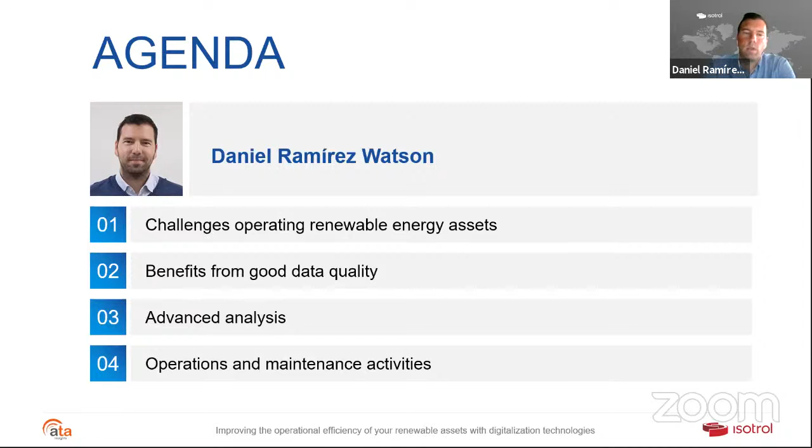First of all, a quick introduction on Isotrol. We're a technological partner for large utilities and renewable energy companies around the world, working in all continents with over 45 gigawatts of renewable energy assets that are being monitored and controlled by our platform, by our solutions. And our experience pretty much covers the entire value chain, which is renewable energies, trading, grid integration, and control of the assets. So let's start.

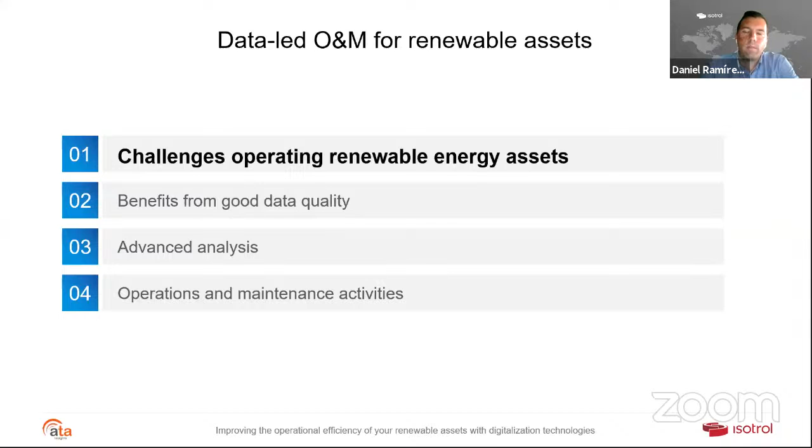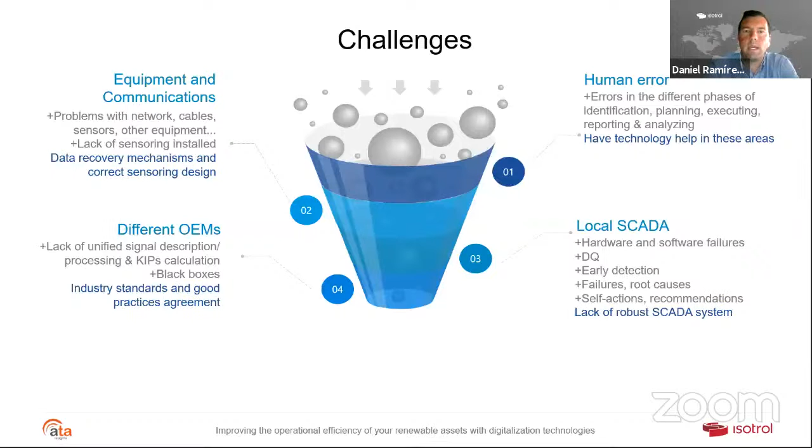Some of the challenges that we've seen in renewable energy plants are for sure failures in different types of equipment and communications from various natures. Having different OEMs, manufacturers spread throughout the plants, and some of them don't actually interact with each other as well as we could expect. Then we always have human error, which is also going to play a role in any project or system that we might have. And we can also have the local SCADA system or communications monitoring and control system have failures or present problems. So we want to talk about things that we can actually do to try to mitigate the challenges that we have.

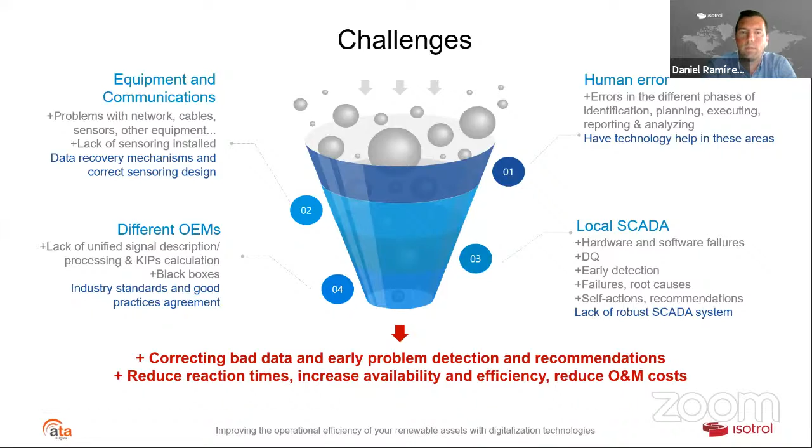So one of them is correcting bad quality data and being able to have early detection of problems and perform recommendations. And all of this is based on trying to reduce the reaction time that we have in our assets in order to increase their availability, the efficiency of the devices, and trying to help on the operation and maintenance side to reduce their cost. Okay, so those are some of the problems that we want to solve.

I want to show you some benefits of having good quality data. So the quality of the information is key. If you don't have good quality data, you're not going to be able to produce accurate KPIs or information. You're going to be working with false results, basically. You're not going to be able to do early detection of issues, and you're not going to be able to speed up the decision making based on the problems that you might have. And therefore increase the operational efficiency, optimize the O&M, and maximize the profitability of the different assets and plants, which is the end goal.

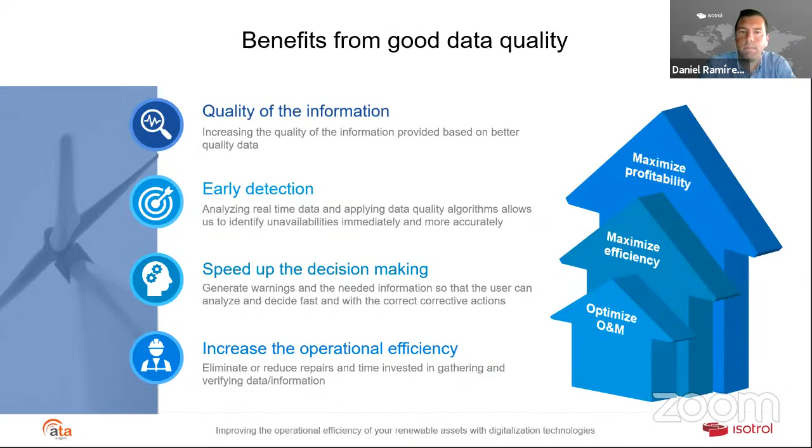Let's look into some of the advanced analytics that we have. So basically, we want to put artificial intelligence and machine learning at the service of renewable energy asset owners. Basically trying to help in the automatization and the detection of different problems that we might have in the plants. Very important to be able to talk about root cause problems, actually find what's going on in the plant, put the spotlight on what's going wrong, and be able to provide a recommendation.

Sometimes the people that are actually performing asset management might not be an expert on a specific wind turbine model or on a specific inverter or on a technology of renewable energy. Maybe they're coming from wind and they have to start working in solar. So having recommendations from the systems that are actually monitoring or supervising the renewable energy assets is crucial.

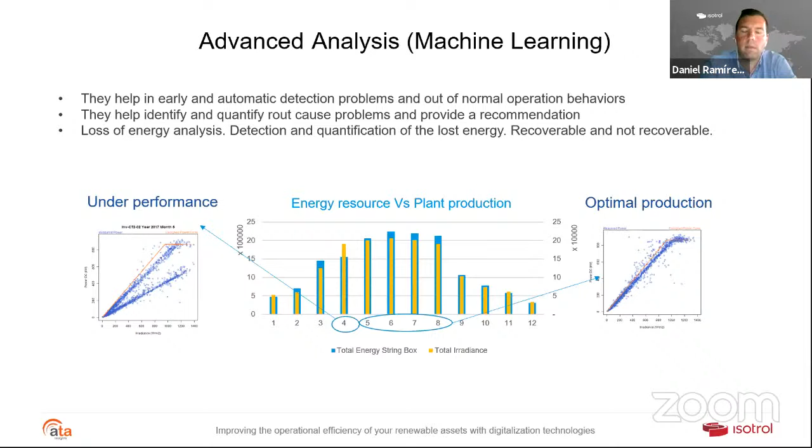We need to know where the loss of energy is coming from. If we don't have a good spotlight on where we're losing our production, we might focus on a problem that could not be affecting the plant as badly as another one. So that is not acceptable, and we need to have a good loss of energy analysis and breakdown, quantification of these energy losses, and a look at whether we can recover them or not.

This is an example of different tracker behaviors, the correct tracker behavior that we should have during the early hours, during midday, during the afternoon, and a view of some of the graphs that would allow us to identify if we're actually having a tracker blockage, a tracker deviation that is not properly following the correct angle it should according to the time of day, and a breakdown of different energy loss causes here on the right side.

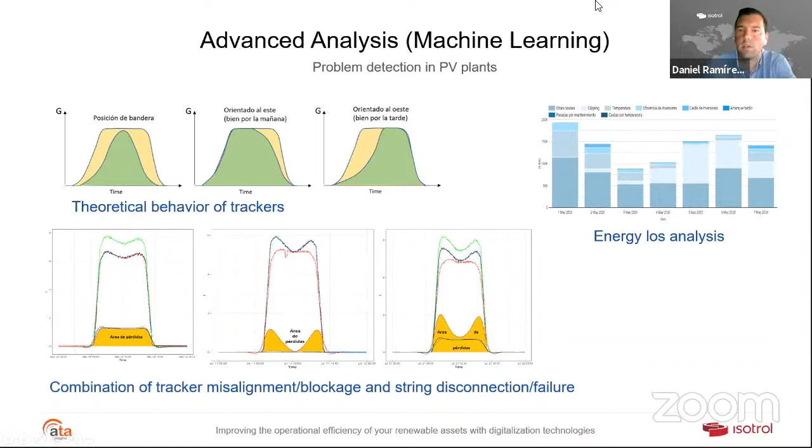Another example, we can have losses associated with multiple effects, like clipping, soiling, panel degradation, cooling problems in the devices, a bad design, lack of sensoring, problems with the sensors, bad quality data, gaps in the data, or lack of standardization in the different devices. They're not communicating properly with each other. Black boxes that we might have out in the field with devices that are not sending enough information for us to make analysis.

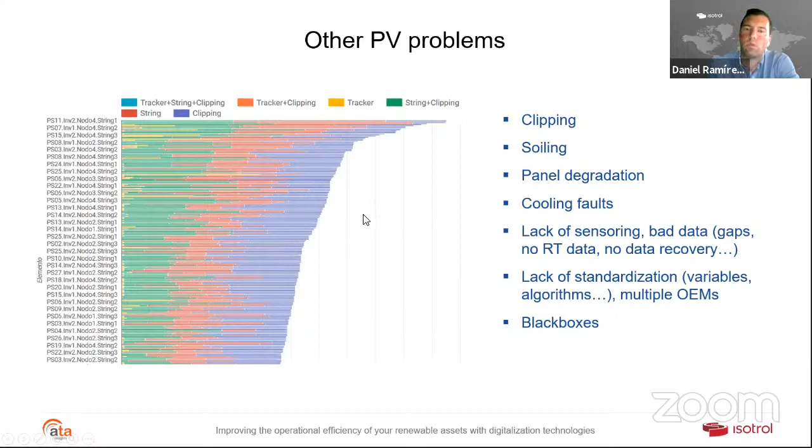So it's very important to be able to make a breakdown of what is causing each energy loss and where they're located, in what device. That's pretty important to be able to make the decision and see where we're losing the most energy.

If we go into the wind farms, we can have another set of multiple issues affecting the performance, the power curves of the wind turbine generators, and those could be external or internal regulation of the wind turbine generators, problems, stops, pitch or yaw misalignment, wake effects by other turbines, or an energy resource problem, or even a power curve deviation from the theoretical manufacturer curve.

So it's very important to be able to plot this, analyze it and compare it over time, and with other devices that could have a similar behavior of a similar nature, in the same wind farm or in a nearby wind farm.

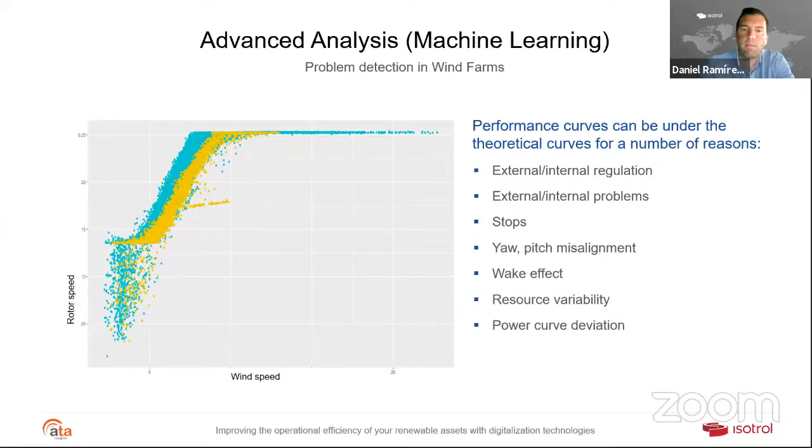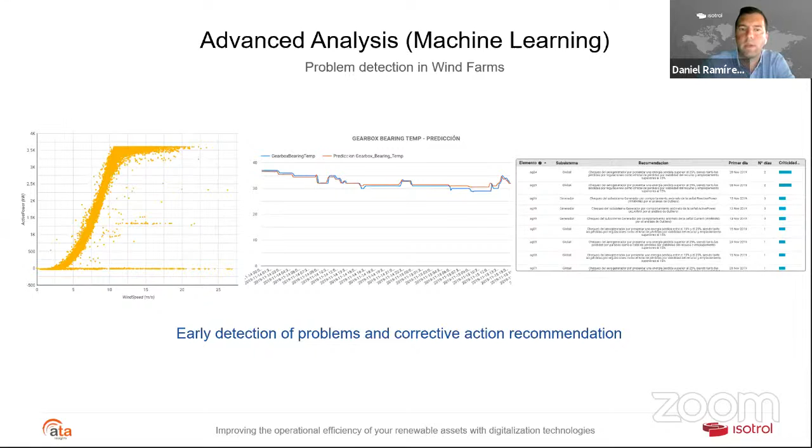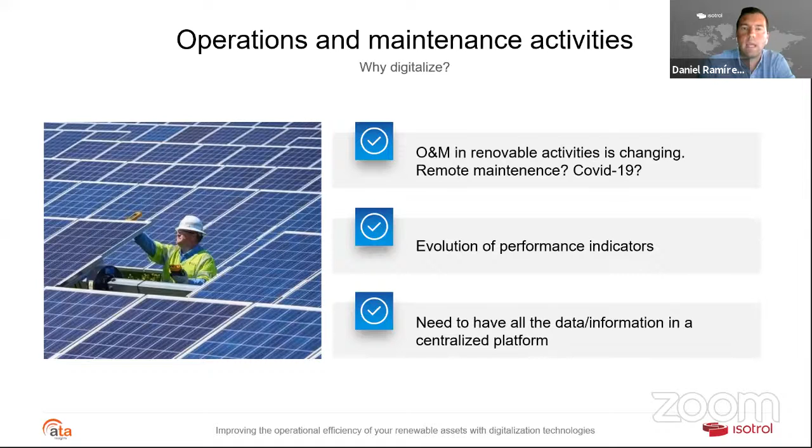And to finish, I'm going to talk a little bit about O&M, a lot of it related to COVID-19, the unfortunate pandemic that we have nowadays. Also, some of the evolution that we've seen in this direction, and the really high need to have all your data and information centralized and usable for customers.

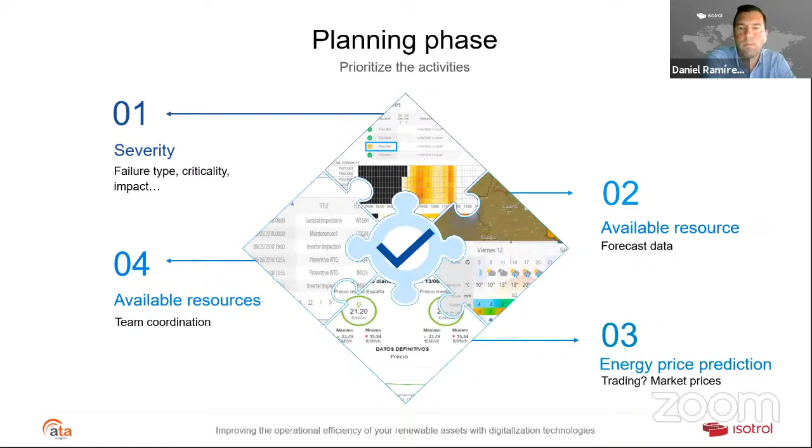It's very important to be able to categorize the events by severity, what's happened in them, and also, either integrated through third-party systems or your own system, to know the energy resource that you're going to have, the forecasted data, and how urgent it is to send crews on site depending on the available energy resource in the following days, and make sure that you have the necessary resources to perform the work, in consumables, tools, manpower, supervisors, etc. And of course, know the energy price, the market price that you will not be making because of shutdowns, preventive or corrective maintenance.

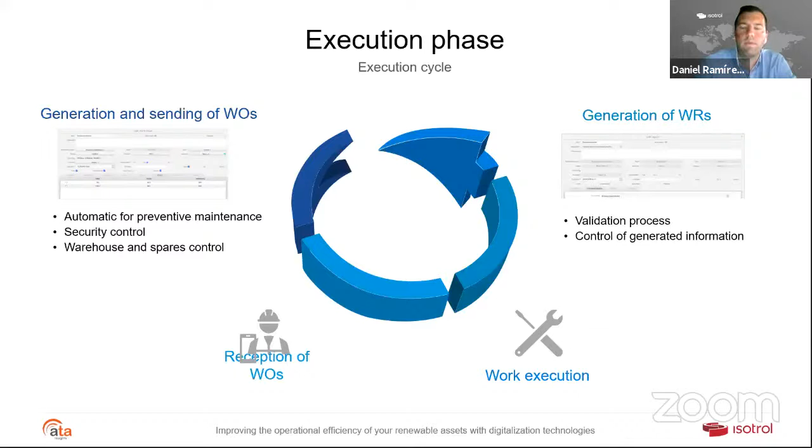Next one would be the execution phase. This is very important to help assist technicians and try to reduce the possibility of human error. So basically having very strong work orders, very easy to fill out in an automatic way, making sure there's no open loops, and no information is going to be lost, making sure you're managing your personnel, your warehouses, being able to receive these work orders in mobile devices, also pretty handy, very important, and have a strong validation process, quick, paperless, and having control of the information that is being generated.

And at the end, like we said, it's good to run data analysis, to run lessons learned, to be able to know what's happened, how long I've taken, if it's complying with the contractual requirements that we might have. So being able to manage the information that has been produced from the O&M side is also very useful. At the end, as a bit of a summary, we're trying to identify and reduce losses, cater to improving the operational efficiency of the plants, and optimizing the O&M tasks that we're performing in order to reduce those costs as well.

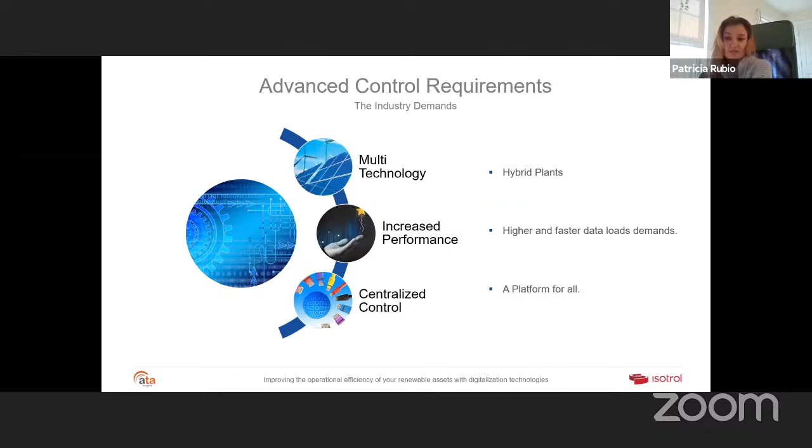So when we look at the most recent industry shifts, we identified 3 major points. We're seeing more and more multi-technology projects or multiple manufacturers for the same technology. We're clearly encountering a growing demand for increased performance and ultimately the centralized control. We need to be able to provide a platform that can be accessed anywhere at any time by different users with diverse profiles. And it needs to also be capable of integrating into third-party systems without incompatibility issues.

So when facing multi-technology challenges, we're looking at a demand that asks for a complete integration compatibility. This means overviewing and interfacing with multiple parties, such as traditional controllers or battery management systems, RTACs, generation units, etc. And we're needing to become vendor agnostic. So we're challenged with a new level of control hierarchy. We're adding for this a new layer of applications to achieve this.

And we need to do this without virtually impacting the unified response of the integrated system. Our users are demanding a simplified and standardized control overview, which is independent to the technology it's integrated to, at the same time as it's allowing us to model the algorithms for their characteristics.

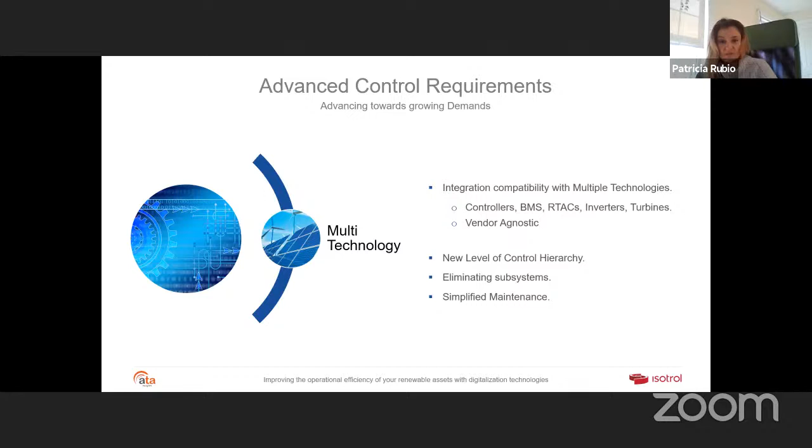And in parallel, we're looking to eliminate having multiple subsystems where possible. If not physically, then virtually. We aim to maintain links, our communication links and networking links, as close to the source of telemetry as possible, ensuring the quality of the data and other points of importance that my colleague Daniel mentioned earlier.

Secondly, we have an ever-growing demand for an even better performance, at the same time that systems integrated become larger and more complex. For example, we're looking at higher historical data extractions with better granularity, or even just faster processing times. So this requirement for heavy historical data loads is just non-negotiable. They are needed by our clients.

This is for various types of processes, from more precise and complex operations and performance reporting to even just warranty claims in which they need to provide large amounts of long-term historical values. And actually, Patricia Nefa will later be telling you a little bit more about the applications that are making important strides thanks to the capacity of successfully managing increased loads of data.

So the performance improvements are clearly a challenge. When introducing a new level of control, we need to optimize the communication protocols in response. And we need to ensure that an architecture with multiple subsystems does not add any delay to the final output. So to achieve this, besides better basic computing power and algorithms, we're demanding to include in our teams the best specialists and professionals, such as database and software architects. And they are who help us to continuously optimize these requests.

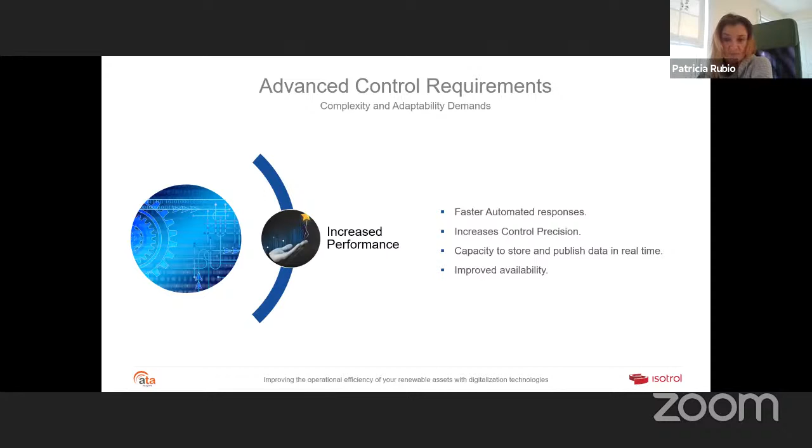And ultimately, we're not just talking about the system's performance, but the renewable energy plant itself, the performance of the plant. The production optimization is a must item of continuous analysis.

And the third, and essentially, we're challenged with the request for a platform that suits all and everyone. And we mean centralized in two aspects. One is to provide unified dynamic visualizations on company-wide platforms, which as mentioned earlier must support multiple users and multiple profiles, all integrated in one. And in the other sense, it is also required to handle multiple production technologies in a single point of control.

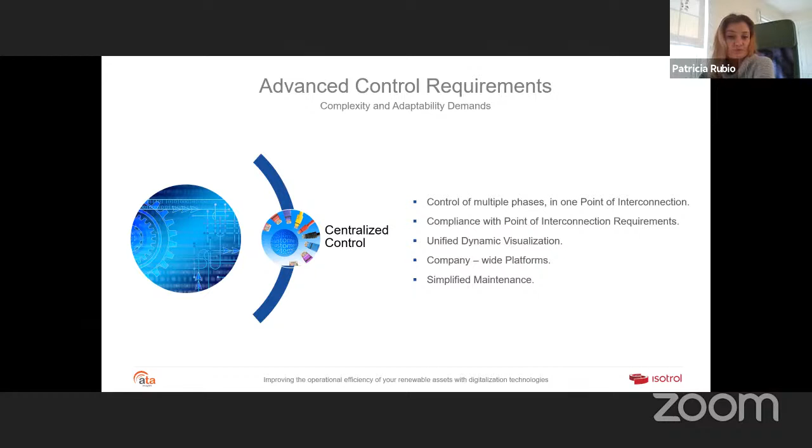So now we'll be looking at what systems are those that are naturally evolving due to the previous prerequisites. We're seeing important evolutions on platforms such as plant local SCADAs, control centers, master power plant controllers, and energy management systems. With you here today, I want us to focus on the two last ones. So these are the master PPC and the EMS, as we call them.

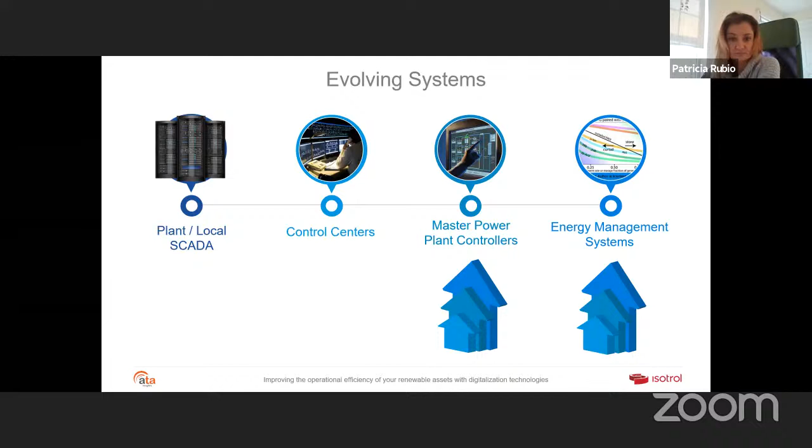So these two systems have been basically born to increase the flexibility in the controls design, and they provide better reliability. They are able to decrease deviations and penalties. They're allowing compliance with the most demanding grid codes, and they will ultimately assist in maximizing the power output from our renewable energy asset at the same time as ensuring stable responses to the operator set points and commands.

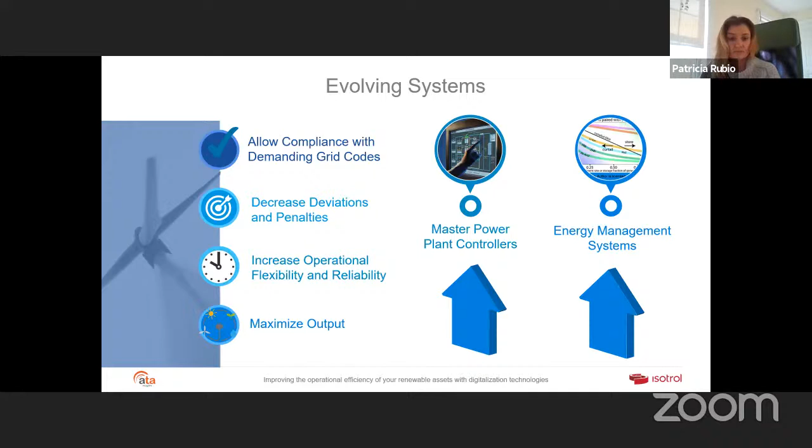And to help you visualize this, I'm going to take a detailed look at what we're describing. We're going to see an insight on the master PPC in a hybrid project application and the energy management system applied to battery storage hybrid farms. Here for a master PPC. So what I mean by a hybrid project is what we often find in a utility scale renewable energy farm, in which we either see a mix of technologies such as wind or PV with BESS, or PV and hydro and so on, or a project with only one type of technology with multiple manufacturers for the generation units.

A master PPC is basically a controller that oversees the other controllers, but it can also directly command the generation units, bypassing these other controllers. It can manage or model a slave PPC as a single generation point. It can perform direct open loop control and dispatch corrected set points, or it can work as the ultimate controller and perform closed loop iterations over the slave systems. In this element, it ideally requires a standalone system.

It is best when it's physically integrated into the substation control room, where you can access the direct meter measurements and the control elements. With this, we achieve even faster and more reliable responses. Without forgetting that the master PPC offers the same functionality as a standard PPC. It can provide an active power reference and curtailment, with the difference that this may come corrected. It can work in frequency response. It can operate voltage control and so on.

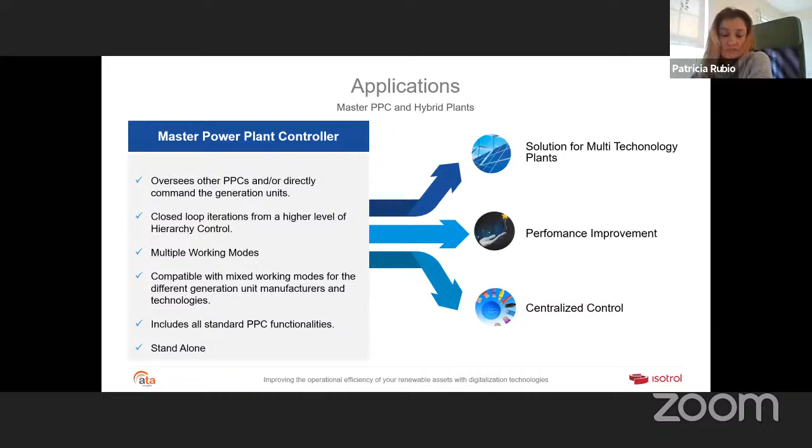And regarding the EMS that we mentioned earlier, the energy management system applied to a battery storage solution. So the main difference for the energy management system is that it's a service or an application that is often embedded in the plant SCADA, and it may share the plant SCADA database. So it does not require a standalone installation such as what I mentioned before for the master PPC. It is also placed at a higher level in the plant hierarchy for control.

So to understand it best, let's take a quick look at how, in this case, storage collaborates in a renewable energy asset. So a battery storage system collaborates in balancing services. It changes the dynamic behavior of our plant. It reduces the stress over the generation units that it's associated to. And it assists on the general system stability, as it's able to provide a very fast and controllable transient response speeds.

So with the adequate energy management system implementation, what we achieve is a generally better global automated supervision. It is overseeing the park response to avoid unwanted energy curtailments or line saturations. The energy management system is basically needed to perform tasks such as ancillary and balancing services, as well as grid services for investment deferral or congestion relief.

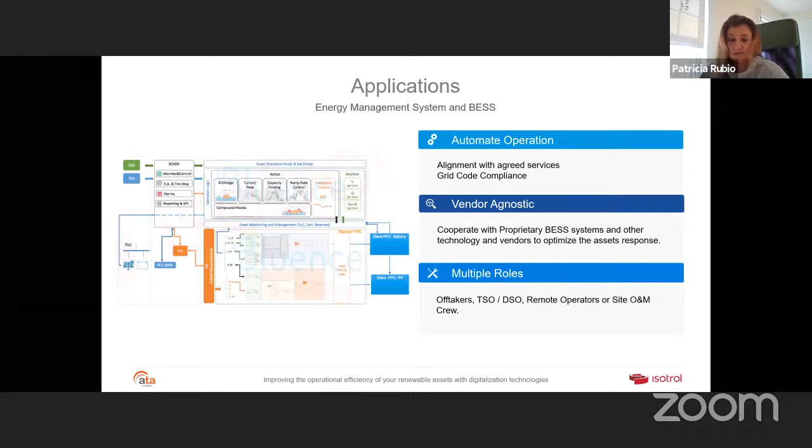For the engineering and consultancy phase, we take into account the preliminary studies, which may be provided by the client, or we may participate in some type of simulations needed to complete it. We will often work together with what we assign as a project director, a person usually designated by the client to review with us the requirements, possible power purchase agreements that can influence, grid codes, and so on. And at this point, it is even possible that we identify additional needs. We will then proceed with the design of the models, alarms, and HMIs.

During the next phase, the integration phase, we perform what we call the FATs, factory acceptance tests, over the prepared systems that have been built according to the previous design requirements. We then move on to install it and integrate it with the different subsystems and site elements. Following this, we start what we call commissioning. It's a phase that includes the final tests and fine-tuning. We perform functional and timing tests, as well as the typical site acceptance tests. And lastly, once the platforms are shown to be compliant and are accepted by the client, we establish an agreement for the long-term support and services to ensure the maximum stability and perform the adequate updates.

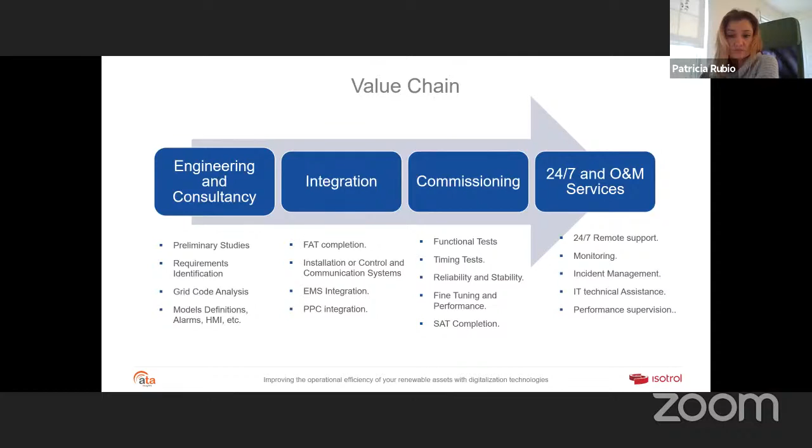And just to conclude, with these two last applications that we have addressed here, we can confirm alignment with industry demands. We have actively anticipated and participated to provide efficient solutions to the arising challenges with platforms that have been transformational in the current SCADA software and control market options.

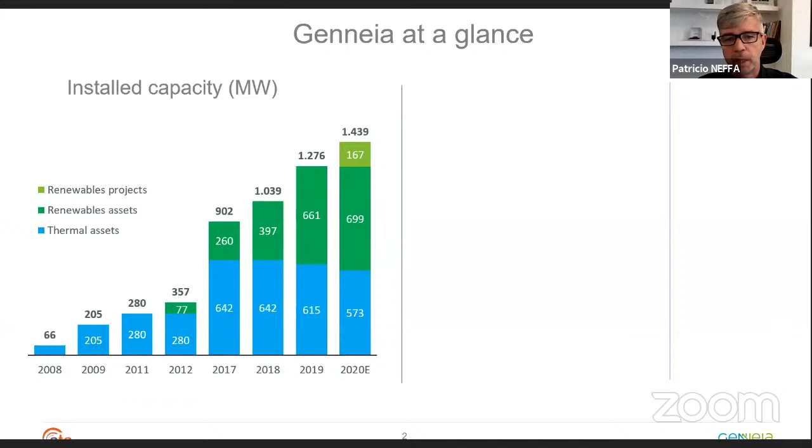Well, as a company, we are a utility in Argentina that shares more or less 30% of the green energy locally. That seems small compared to European or US scale, but nevertheless for Argentina, 1.4 gigawatts means something, a big number for us. As you can see, we have experienced a big progression during the last 4 years, and differentiation going green compared to the thermal assets, we were declining and selling these thermal assets.

In total, we have 3 main types of energy generation. Power generation from wind accounts for more than 600 megas, which is the most important power generation type. We have also assets in terms of solar and also aeroderivative turbines, gas turbines that provide dispatchable energy to the system. So the first thing that you will notice is complexity. Complexity to manage different OEMs, different types of energy, different sources of energy. This is one of the big issues that we face every day in operation.

Another big challenge we face every day is distance. Argentina is a big country, and we have more or less 1,000 kilometers between one plant and the other. So it creates difficulty in the time of travel and reaching these plants physically. So whatever tasks we can do remotely, whatever solution we can provide remotely will be very beneficial for the operation. Here you can see more or less the distribution, and you can find more information on the Genneia website. So a very young, innovative, independent utility that caught the wave of renewable energy and decided to implement, since the very beginning of the life cycle of its wind farms and renewable farms, some methodology to increase efficiency.

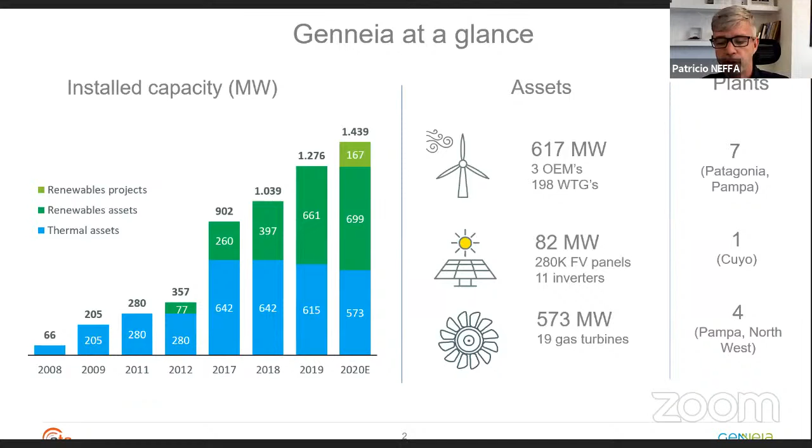So in my experience, in more than 8 years in the renewable energy sector, we have classified 3 different stages of maturity in terms of asset management. The basis that everyone can start from is what we see as the bottom line. No need to have an independent SCADA. You have 1 or 2 wind farms or solar farms. The data are provided by the OEMs through their portals. You have an acceptable performance, but limited capabilities to audit what the OEMs are doing. So we also have limited capacity to anticipate events and be very reliable in terms of prognosis of generation. And of course, you don't have an integrated asset performance management tool.

The second stage is a little more advanced, perhaps an increased scale of 500 megas to 1.2, 1.5 gigawatts, where you take the decision of implementing independent SCADA management. You create a remote operating center to consolidate the monitoring, diagnosis, and communication to the grid provider, and you also increase capabilities in terms of actions to be taken regarding production, and you audit more what the OEMs are doing. But you fail to have automated data diagnosis, and you compensate for this with internal resources, meaning analysts that will do their jobs. The next stage, what I call excellence, is the stage in which we all want to be, and probably all the members of this webinar, to reach excellence through the automation of the analysis.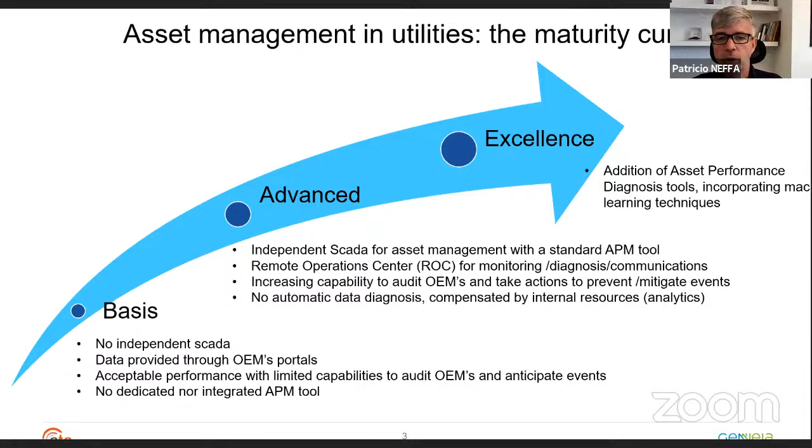So to illustrate this, I will show this image that I like very much. It's an image to represent what we feel in operation every day. When you need this data, the data is somewhere in this stadium, okay? Just as an example, 50 megawatt photovoltaic plants generate more than 80,000 tags per day, meaning a lot of information.

And typically, you will look to find this information, this data that you need for your optimization. And to find it will take you a lot of time and perhaps a lot of money. So it's like finding your buddy or your wife or your friend in a football stadium, and it will take a lot of time. That's the image that I want to represent.

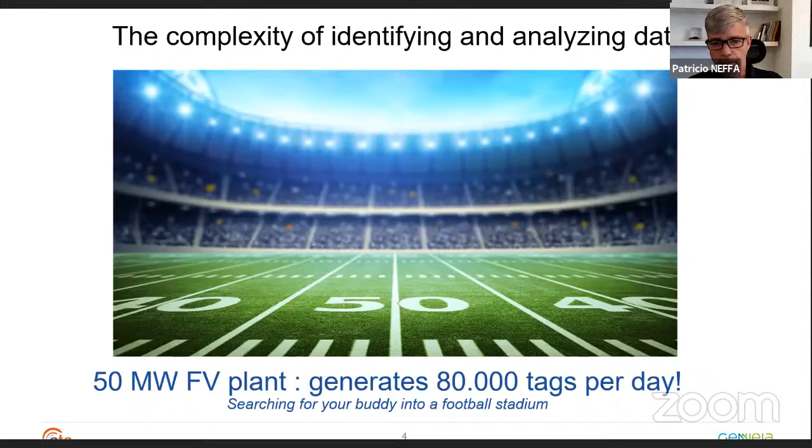So just as a case to illustrate this, I will show you what we face every day in operation. You have several wind farms in Patagonia, and you have to monitor these wind farms constantly. And you cannot have 50 guys to do it. You have a couple of guys, they are the good ones, they are very skilled, but they rely on software and algorithms that help them to do their job better.

Okay, for doing this, I take as an example something that occurred in the biggest wind farm in Argentina at 220 megawatts, with a wind turbine where we noticed from the performance analysis that something was going wrong. In this case, it was a pitch system problem. The system automatically detects that there is something going wrong.

It analyzed the behavior, comparing the patterns of the way it should work in other wind farms, and helps the operator or the analyst, the asset manager in that case, by providing some troubleshooting inputs and recommendations to do their job. So the system automatically provides information that enables the asset manager to take decisions.

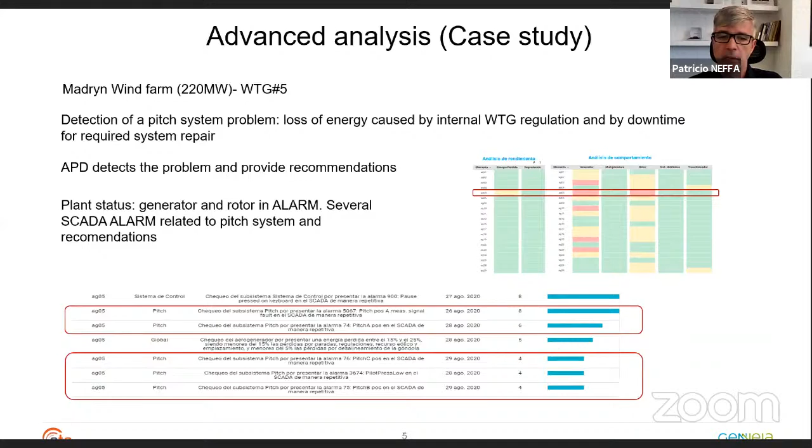And in that case, we went with this information to the OEM. We spoke with them. We said, hey, people, you have a problem. You can see this power curve in which we have a wind turbine that is rated to 3.6 mega and is not reaching 2.7. There is a problem, and the problem may be this one, and this one.

So the OEM, which generally has a full scope agreement, won't be able to say no, there is no problem, because we are seeing the same thing. We are analyzing the same data. The point is that we are reaching faster and more accurately where the problem is. So we can tackle and anticipate this. In that case, having discovered that there is a problem,

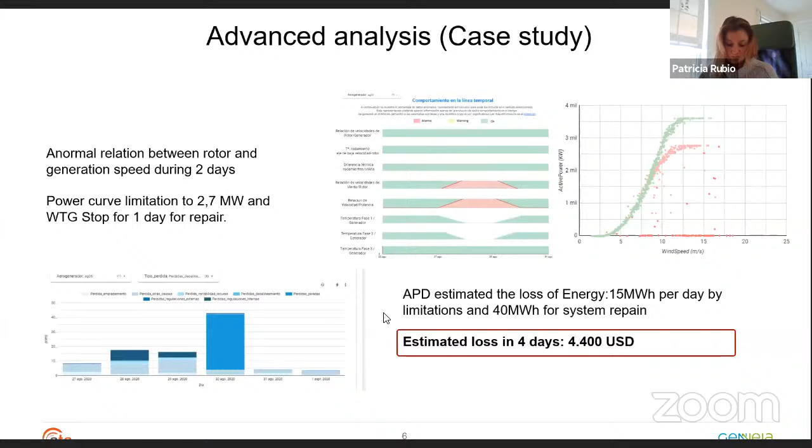Patricio, I don't know why, but I seem to have lost the sound coming from your end. Can you try again? Can you try speaking again, to see if I can hear? So now your microphone is on mute. Okay, now I can hear you. Yeah, perfect. Sorry, I did not touch anything. Sorry, Carlos. Mysteries of technology. It's fine. Thanks. So sorry for the disturbance.

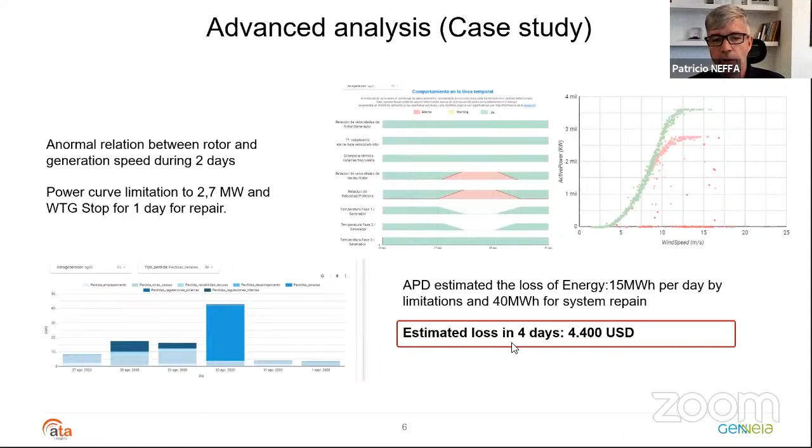So at the end of the day, we noticed that in this case we lost some energy during these 4 days, but we could have lost a lot more energy if we did not provide this information accurately. So this is my last slide, before handing over to you, Carlos. This is my motto, a lesson learned to share with everyone: you cannot optimize what you don't control.

That means that if you are just a spectator, you will see the wind farm running well, your asset running well, but you cannot optimize it as you wish. So there are 4 major learnings. The first is to adapt existing asset performance management or diagnosis solutions according to your maturity curve and context. You will find a lot of solutions in the market.

My advice is to take whatever solution can be independent from the OEMs and technologically agnostic, to be adaptable to every platform or OEM: Nordex, Acciona, Siemens Gamesa, Vestas, and so on.

The second learning is that loss of energy prevention and anticipation in the decision-making process are the best way to defend with your financial director the return on investment of implementing this solution. Because of course, this solution will mean some cost, but this cost can be repaid by the loss of energy prevention and anticipation. Okay.